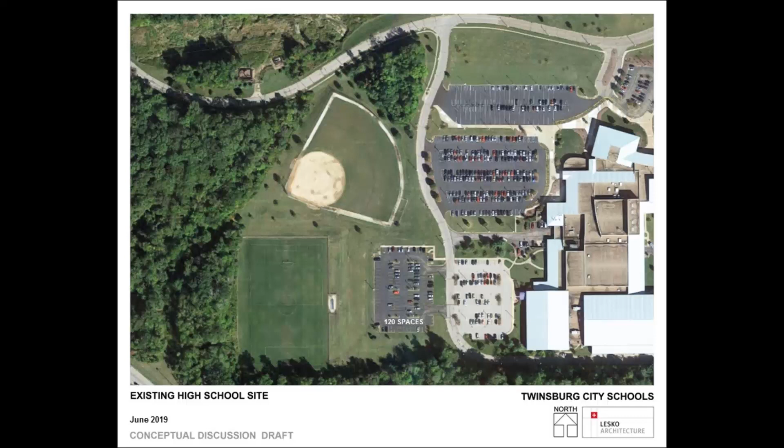This is our existing high school site that we were referring to, and here's an overlay of what a new 3-grade building could look like, or a 6-8 building. It would be a 2-story building. Some of the items we would be looking at include separating the bus traffic from the car traffic, so you can see how that's separate.

That's a big piece of any design. We're trying to make sure that we would maintain, based on some feedback we've received already, some additional parking for the community center and the overflow parking. But again, this is a design or initial conceptual phase, so what it might look like in the long term might be different than this. In fact, more than likely it would be. But this would be a rendition of the 6-8 building.

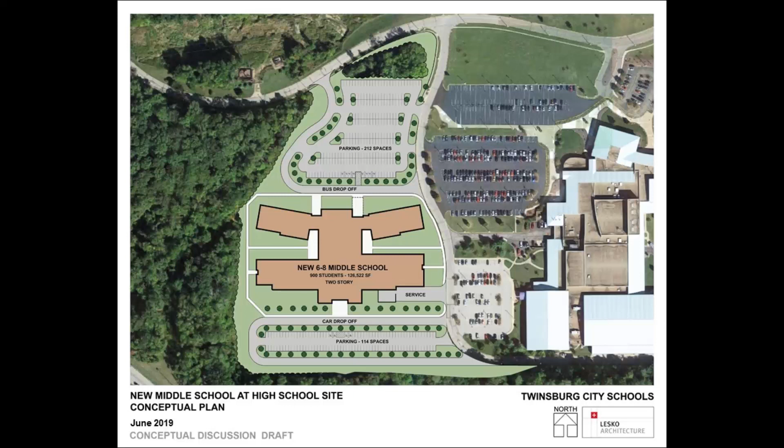The other consideration we're concerned about is making sure that we address egress issues. We've identified that there's only one form of egress for the high school currently. So we would want to review that, whether it be additional access through the back of the building or going into Ravenna Road at another spot. Of course, there would need to be extensive traffic studies related to that, but that's one issue we've been talking through in regards to this plan.

It's very important for the Board of Education to make sure that if we're building a project on fields that are currently used, especially by our rec programs, that we replace them one-to-one. Back to the Dodge property, I initially indicated that if we're going to build the new school over on the high school campus, we would be displacing a boys soccer field as well as a baseball field.

So what we have conceptually here for you to consider this evening, starting with the varsity field, that would of course remain the same. It's one of the gems here in our school community. We would move the high school field from across the street to where Chad has the pointer there. We would renovate the current field over at the Dodge property. It's in need of some significant renovation.

We would be moving the boys' practice soccer field right there, and the girls' practice soccer field, which is actually located where that parking lot design currently is. You notice there's a dotted line - that's the current outline of the Dodge building. Underneath that would be the new bus garage, which is the tan object right in the middle, surrounded by parking spaces.

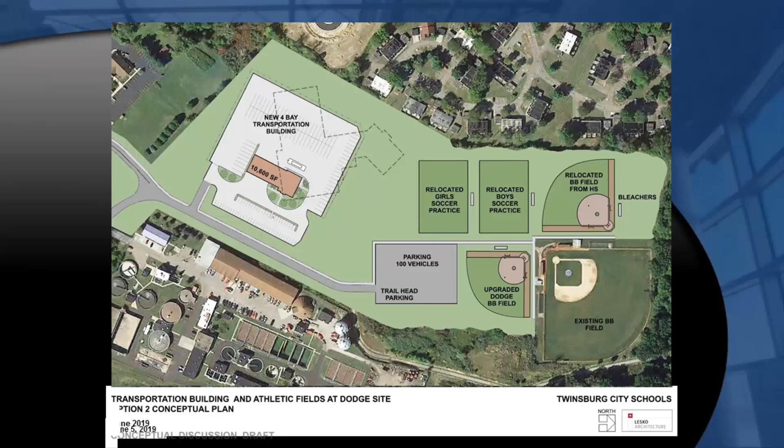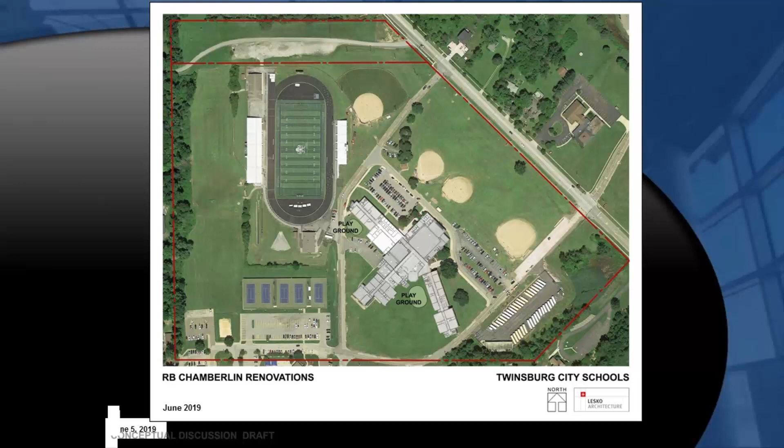So finishing out the plan for the second option, this is the existing RB Chamberlin site. The major renovations there, besides the roofing, would be the addition of playground areas. This is currently where the transportation bus garage is, and that would be how RBC would situate. We try to make sure that we're separating parent and bus traffic, or vice versa, in that process.

That would be option number 2. Furthermore, we've been talking with a number of members of the community, and with our facilities strategic planning group, and through that we've received additional ideas that we wanted to share with you.

Again, all of these are conceptual and they keep evolving every single day. Yesterday we had just some additional input as well, so we continue to adjust our plan based on the feedback that we receive.

One of the ideas that came forward through conversations I had with Laura Leonard over at the Twinsburg Public Library is her vision for the library to expand its space. Laura is very interested in there being an auditorium that could be used as a multi-purpose space.

Additionally, we've had conversations about library patrons being able to use Twinsburg High School in the evening for adult education. At the same time, the Board of Education office is out of space. Another challenge is that when we want to provide professional development to our staff during the school day, we don't have a space to do that unless we move students out of a computer lab or a large room. This next idea was born out of those several concerns.

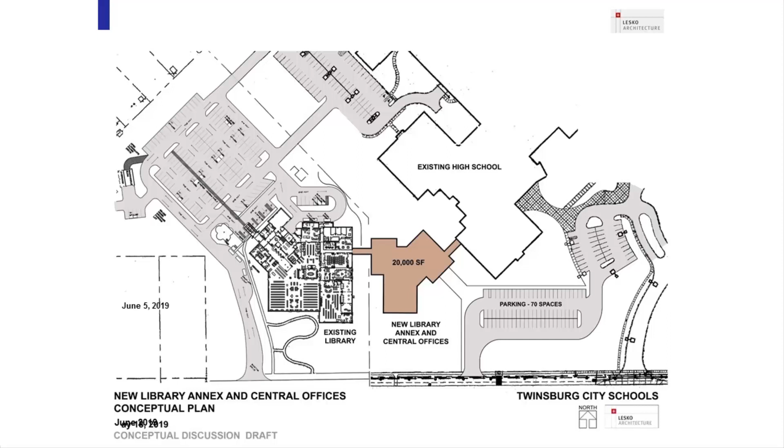Laura is currently talking about her project regarding the parking lot — I'm not going to speak for her, but she has some traffic flow issues over at the library parking lot that we hope to address with a greater project, including the school district.

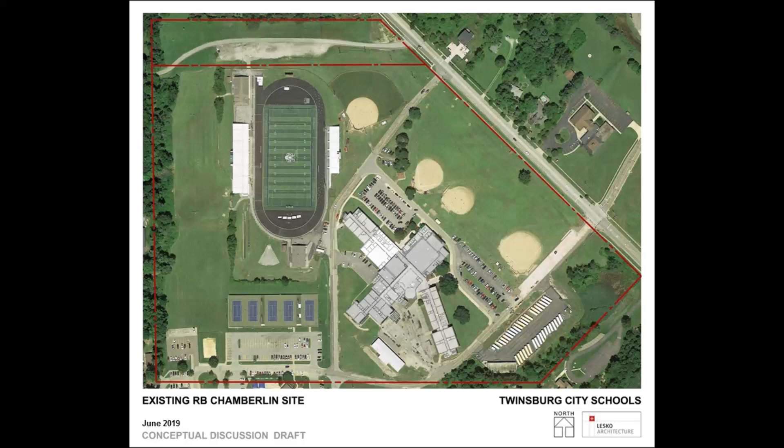As we mentioned throughout our community feedback, one of the items that consistently has been brought up is parking at our stadium. This is our existing site. One of the things we currently do for excess parking is park on our fields, pretty much anywhere we can find a spot.

So this would essentially build a gateway, or a grand entrance, to our stadium, which would be located in the northeast corner of the stadium based on this conceptual drawing. There would be over 575 spots in that location.

This is where existing Hoon Field is. You'd also have parking on the side here for the field house, for the coaches, players, and things like that.

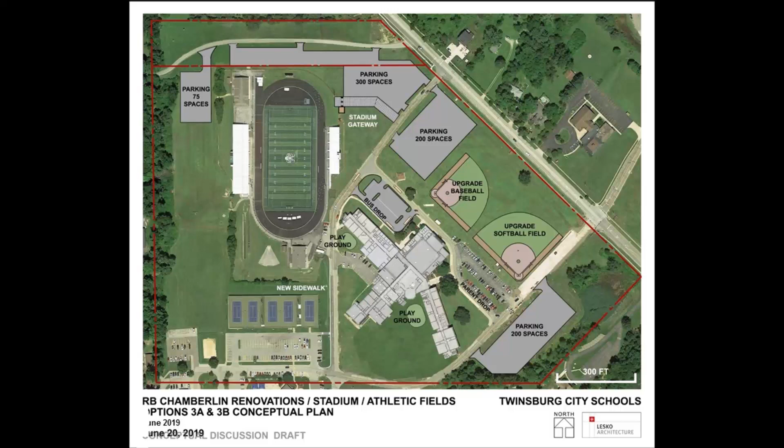We'd be able to potentially get additional parking over by the old bus garage, and then update some of our fields. The other thing is that some people park over by the tennis courts, and so there's a proposal to consider a new sidewalk going alongside to provide easier access to the stadium.

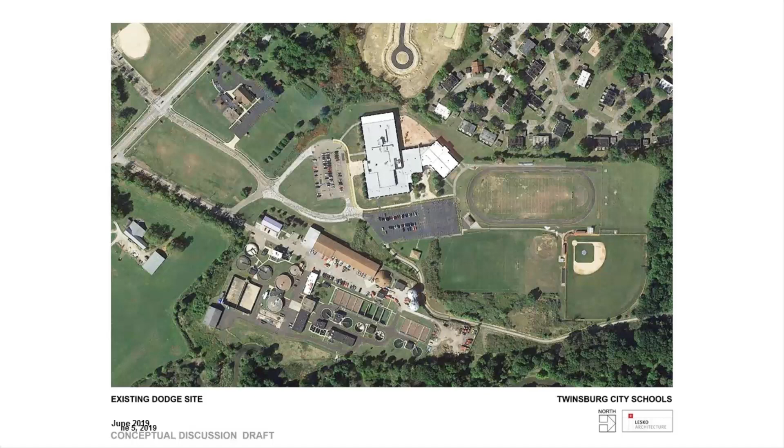As we indicated, when we consider any of these conceptual projects, we recognize that any of the fields we're displacing need a home. So back over to George G. Dodge, its current property, there's a conceptual drawing of how we could potentially move the fields that would need to be relocated from the Stadium Gateway project across the street to Dodge. Basically, the Dodge property would become athletic fields, and the school district's transportation department, as well as our maintenance garage and a place for our maintenance staff to do their various projects.

In this particular conceptual site plan, you can see the addition of moving the girls' soccer field across the street, in addition to the baseball diamond that is in need of relocation, to provide for the extra parking spots on what is currently the front lot of R.B. Chamberlain Middle School. You can see that we're going to extend the parking spaces because with that much activity going around, especially this time of the year, there would need to be plenty of parking for our parents and residents.

The trailhead is right there. We understand the importance of that to the city, so we've included that. In addition, there would be a new restroom and changing facility for our athletes and for the rec leagues maintained by the board here too. So those are the relocated fields. We're excited to understand that that could all fit across the street.

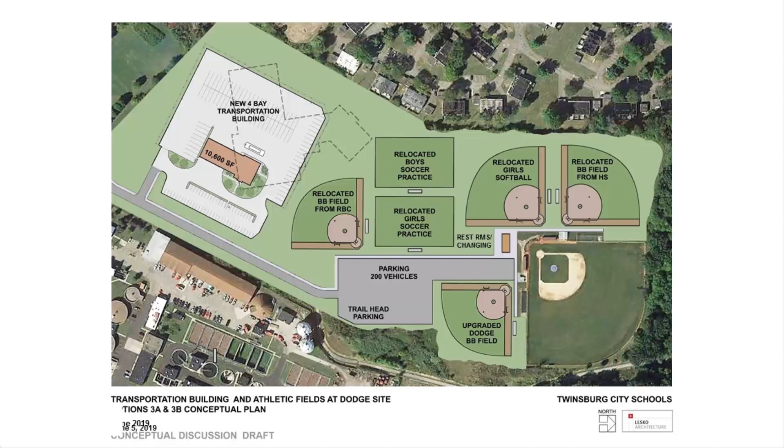Of course, there would be considerations for the residents that live nearby. One of the thoughts brought up at the trustee meeting last week was that you're making a very quiet place kind of noisy in the summertime. How would you address that with the residents who now live in those new homes bordering the Dodge property? Obviously those are residents we have to engage in a conversation about the potential relocation of the fields. But for the sake of this presentation this evening, we're just happy to know that we have space to relocate the fields and that we have the ability to continue providing all of our residents with athletic opportunities beyond what we do for our school kids.

And then the last idea that came forward out of the facilities assessment was talking about our elementary school, the Wilcox building, and Bissell. It was Walt Hoffman, as you know, president of the council over in the village, who has served in multiple capacities for the Board of Education, most recently as a member of CHAD's Facilities Action Team, who helped us understand that the property over at Bissell is actually greater than we thought it was. There's a drawing ringed by the red line around the current building and how far the property line extends.

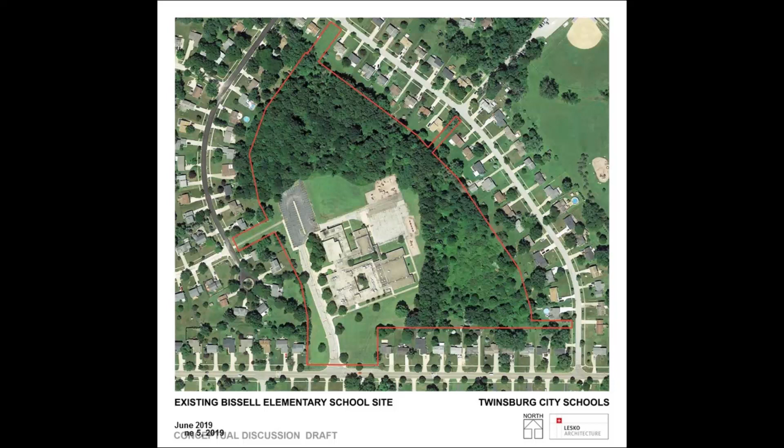One of the ideas the members of the action team asked us to consider is what it would be like to build an additional school, beyond the replacement for Dodge, to house preschool through grade 3. In our district this past year, the Board of Education provided the opportunity to expand preschool programming through our kindergarten preparatory program. The data we've been able to collect from children who participated in both the KPP as well as the integrated program shows phenomenal results, because we're getting our students in early, providing them intervention and setting them on a course of learning sooner than we had otherwise.

So there is great interest in expanding preschool, but Wilcox has no more space for us to do that. If we take a look at the conceptual plan here, there's actually enough space over on the Bissell property to build a building that would hold students in grades pre-K through 3, which would mean the current Wilcox property could be sold and used for another purpose, and we would be able to expand the preschool.

As Chad mentioned, we want to make sure if we're going to build a new school that there is enough egress and that we separate car traffic from bus traffic, because all of our schools at this point are struggling with the car-bus traffic situation. We wanted to be able to address that in any plans moving forward.

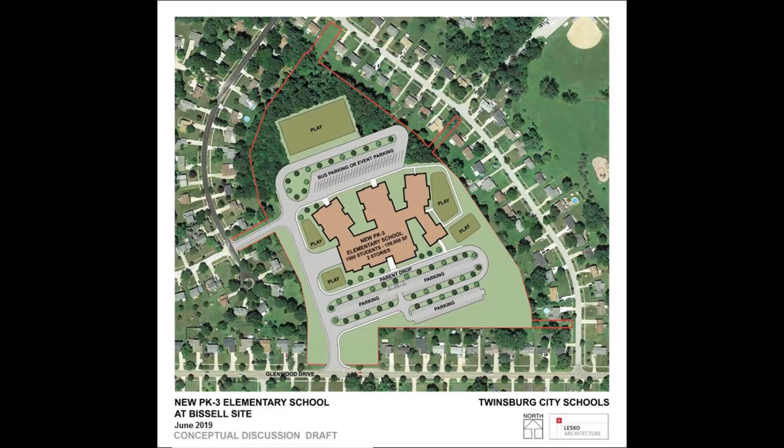So that concludes our presentation this evening. As you can see, we have a lot of work to do, a lot of individuals to engage through conversations, not only with our elected officials like this evening, but also our parents, our residents, our senior citizens. We're very proud of our facilities as they currently stand. They've done a great job educating many thousands of Tigers over the time. But what we do know is moving forward, some of those spaces need to be renovated.